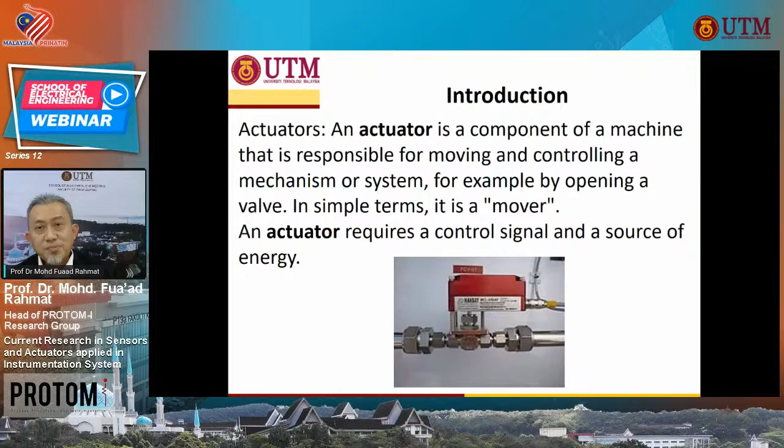And then these electrical signals will be converted in terms of amplifications, rectifications, filtering, and so on. And this variable will be manipulated and transmitted to the computer for further processing, either for control, for display, and so on.

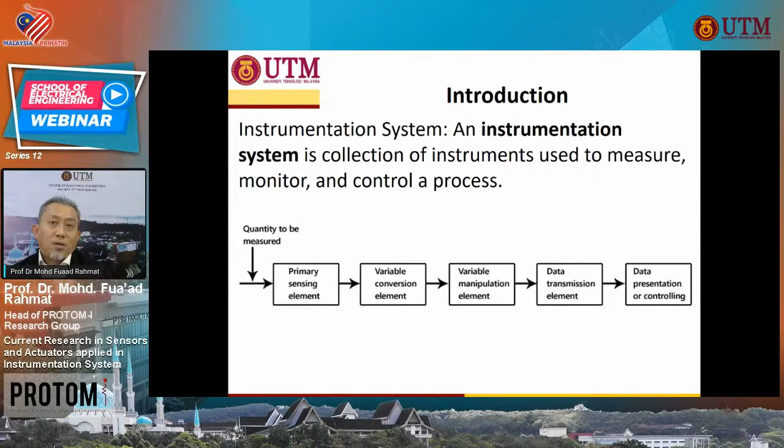So today I will talk about some activities in the research in our group, which is PROTOM-i, the short form of Process Tomography and Instrumentations. The backbone of this group is the Process Tomography System research, that's why it is in the middle.

The support pillars consist of 6 support pillars from other researchers as well, which is system identification and estimations, MEMS (microelectromechanical systems), control and automations, microfluidics, signal processing, and artificial intelligence and optimizations. Today I'm going to talk about process tomography systems and system ID and estimations, and the rest I will share with other researchers in my group.

So this is the Process Tomography and Instrumentation research group members. We consist of 17 members. For those in the School of Electrical Engineering, this is familiar to them.

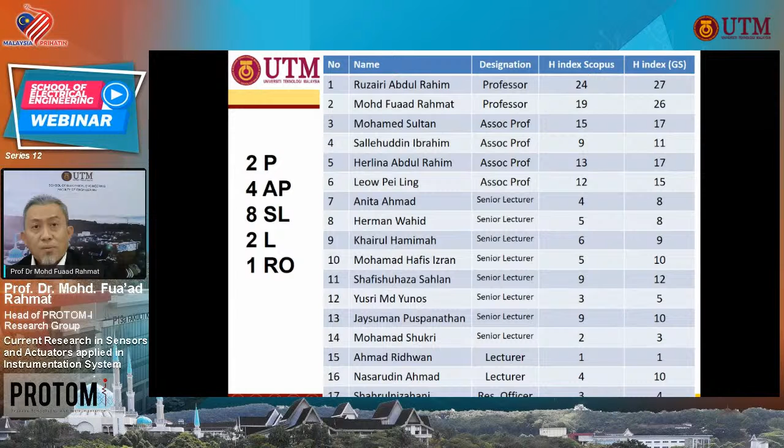17 members in the PROTOM-i research group, and our strength is shown here, where we have 2 professors, 4 associate professors, 8 senior lecturers, 2 lecturers, and 1 research officer. The strength of our group is also indicated by our publication strength, where the H-index varies from 1 to 24, as listed in this slide.

So that is part 1 of my presentation. I will go on to part 2, research in process tomography, which is the backbone of the research group PROTOM-i. If you go to Wikipedia or the dictionary, tomography is the combination of two words, tomo and graph, which is a slice of picture that represents flow in a pipe.

As we know, in an industrial pipe we have liquid, gas, and solids that flow inside the pipe. So engineers need to design a tomographic measurement system in order to monitor the flow of the gas, the liquid, the solids inside the pipe by using sensors that circulate around the pipe.

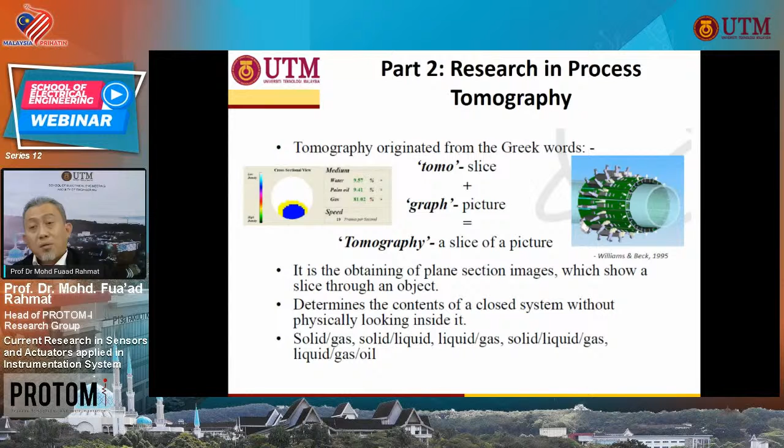So it is obtaining a plane of section image which shows a slice through an object. We don't have to break the pipe; we can monitor it using sensors which give signals from the flow, and these signals will be manipulated by the image reconstruction algorithm for display on the computer.

So why is process tomography important? For measurement of flow in clean liquids and fluids, we have a wide choice of instrumentation. However, if the process contains two components, for example solids and gas, or solid and liquid, or three components like oil, gas, and water, which cannot mix together, that becomes a problem for engineers to monitor the flow of that particular pipe.

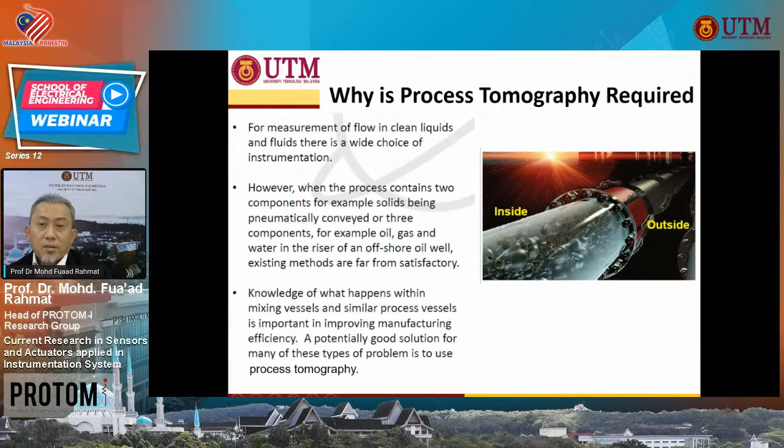Knowledge of what happens within mixing vessels and similar process vessels is important in improving manufacturing efficiency. A potential good solution for this type of problem is to use process tomography, which is cheaper and safer for monitoring the process pipe.

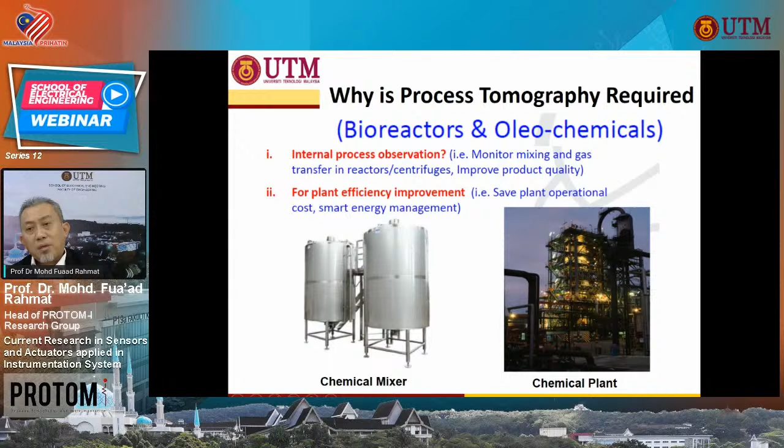Moreover, if we go to a chemical engineering plant or chemical mixer, process tomography is required, especially for bioreactors and oleochemical processes for internal process observations, in order to monitor mixing and gas transfer in reactors, improve product quality, and save plant operational costs with smart energy management systems. That's why we need process tomography to help researchers and engineers for the benefit of the process.

So in overview, tomography is an open loop system where you measure signals from the sensors, and these signals go to signal processing or signal conditioning, then to the image reconstruction algorithm, and then are displayed on the computer. That's why we need sensors mounted around the pipe, and we have to do some mapping - the inverse problems and the forward problems.

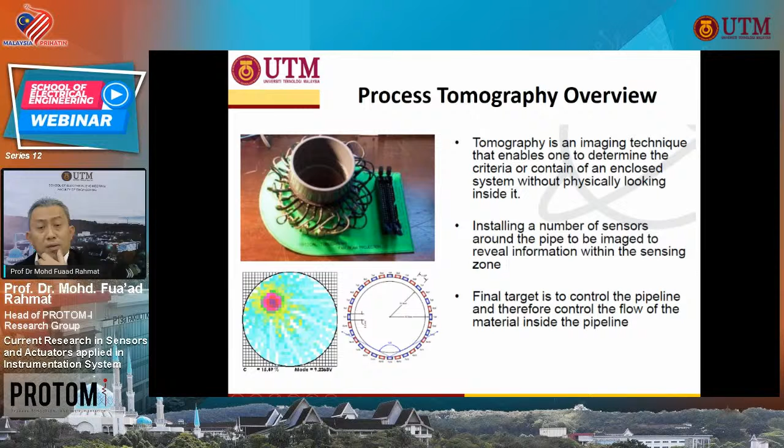Basically, tomography sensors consist of two parts: the hard field and the soft field. Hard field sets up a uniform narrow field for which the sensitivity is independent of the parameter distribution inside the sensor. So optical tomography, positron, X-ray, gamma ray are all considered as hard field.

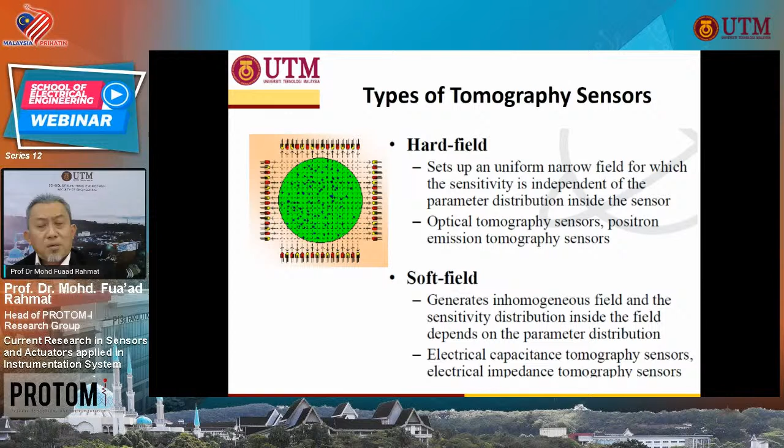The second one is the soft field, where we generate an inhomogeneous field, and the sensitivity distribution inside the field depends on the parameter distributions, which use a low current. Examples of this are electrical capacitance tomography, electrical impedance tomography, and so on.

The block diagram of process tomography, as I say, is an open loop system. It consists of an industrial pipeline, and the sensor mechanism can vary, whether you're using optical, capacitance, resistance, impedance, electrical charge, and so on. This sensor will detect the physical signals inside the pipe and convert them to voltage or current.

This voltage or current will go to the second phase, which is signal conditioning. Signal conditioning consists of pre-amplification, amplifier, rectifier, low pass filter, and so on, in order to improve the signals that bring the information, and it goes to the data acquisition system.

It goes to the image reconstruction algorithms. Most of the research in process tomography, the significant contribution is more towards the image reconstruction algorithm - how we manipulate the voltage and current information obtained from the measurement to construct the most accurate image representing the slice of the pipe.

This will be useful for inspections, concentration determinations, velocity measurements, mass flow rate measurements, environmental monitoring, flow measurement, or identification of the flow pattern inside the plant.

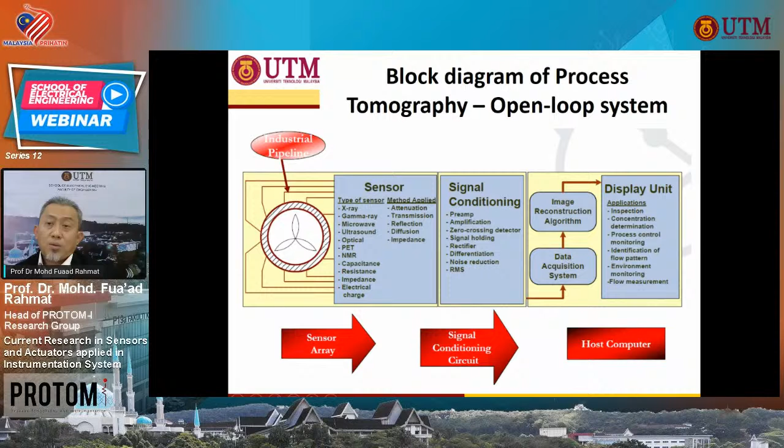Basically, industrial process tomography came in the early 1990s and late 1980s, due to the fact that tomography has been successfully implemented in medical tomography, where doctors use a scanner for body scanning in order to detect problems in humans - on the head, the leg, and so on - using X-ray as shown in the slide.

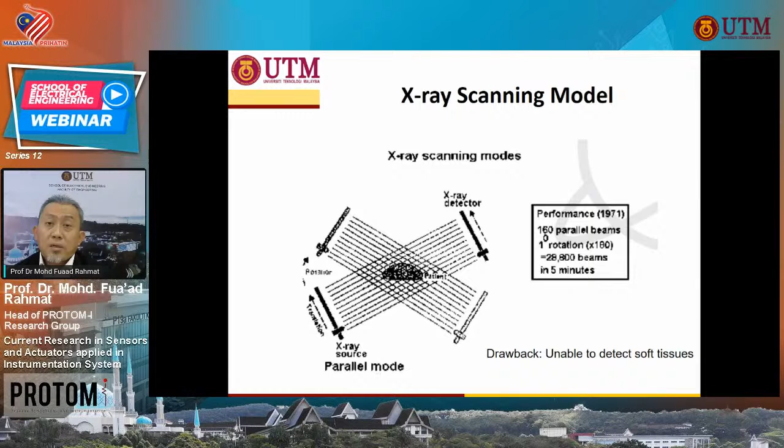But as you know, X-ray has its own disadvantage because it cannot detect soft tissues like discs between the lumbar, the brain, and other things. This disadvantage of X-ray scanning is covered by the medical tomography named MRI, or magnetic resonance imaging.

Nowadays if people have, for example, a slip disc problem, they're having lower back pain and leg pain. This is due to the spine of that human not being in good condition, and this can be detected by using MRI, where MRI is able to detect the soft tissues inside the human body.

So these are some of the examples of what MRI can do - for brain, for knee, for cancer, for depression, and for slip disc detection.

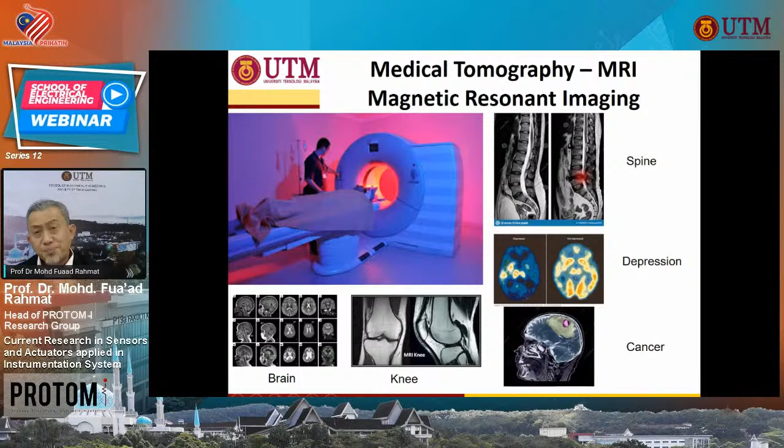We have discussed previously industrial process tomography and medical tomography. So what is the major difference between these two? Basically it is the time scale - the time scale and the data collected in order to reconstruct the image.

Medical methods can often take several tens of minutes to obtain a set of results consisting of many views and many projections from which the tomogram may be obtained. But in many process measurements, the event is constantly varying, so only a relatively few data are collected and available for the tomogram.

That's why industrial process tomography compared to medical process tomography is hugely different in terms of image accuracy, where process tomography is less accurate compared to the image refined by medical methods.

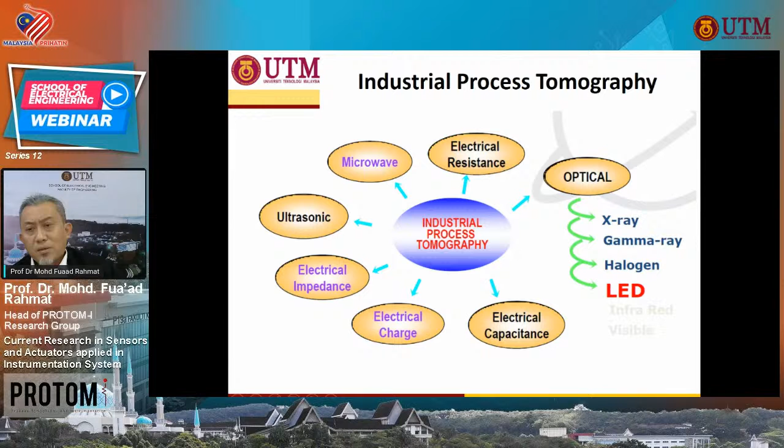From now on, I will describe industrial process tomography, which consists of some listed here: optical, electrical resistance, microwave, ultrasonics, electrical impedance, electrical charge, and electrical capacitance. Due to the shortage of time, I will discuss optical tomography, electrical capacitance, and electrical charge for the audience today.

Optical tomography system, or OTS, is shown basically from this block diagram, where we apply optical sensors - several optical sensors - in dual plane, one upstream and one downstream, where we arrange such that these optical sensors have transmitters and receivers.

Projection of the beam of the optical sensors can be used as parallel beam or fan beam. At the end of the day, the target is to collect data when the particle flows inside the pipe. This data will be captured by the data acquisition system, then reconstructed using algorithms for image display.

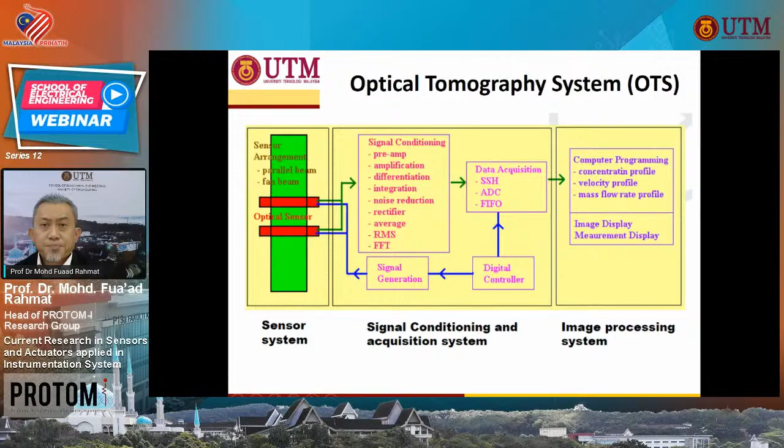As I told you before, for optical tomography systems, we have two basic projections of the beam from the transmitter to the receiver. The transmitter produces the beam and the receiver receives it. This beam projection consists of two types: parallel beam projections, where the number of emitters and receivers are the same and light divergence is not allowed, and fan beam projections, where the number of emitters and receivers can be unequal and light divergence is needed. So fan beam projection is much better, more recent compared to parallel beam projections.

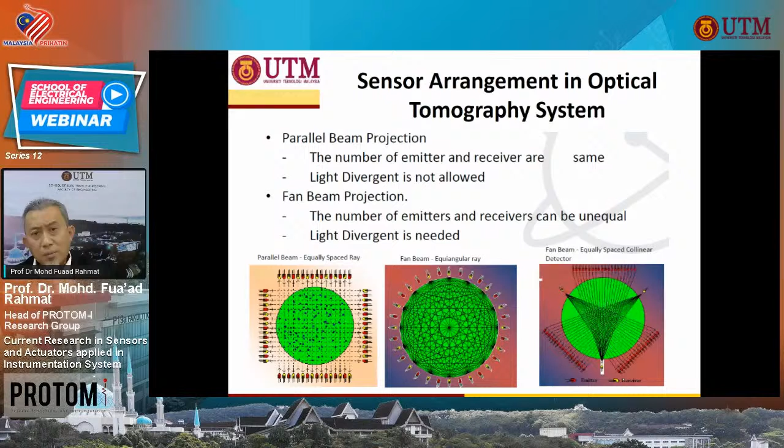In the early 1990s, optical tomography used pin photodiodes, where we arrange the pin photodiodes in a single plane, and there is an optical cable with a light source to transmit the beam from the transmitter to the receiver in order to obtain the image that crosses the pipe in the process rig.

After 1996, people stopped using pin photodiodes. Instead, people used LED, light emitting diode, which is much better and more accurate in terms of data acquisition. With the LED, we also associate it with fan beam projections, which give a better and more accurate image compared to the pin photodiode and parallel beam projections.

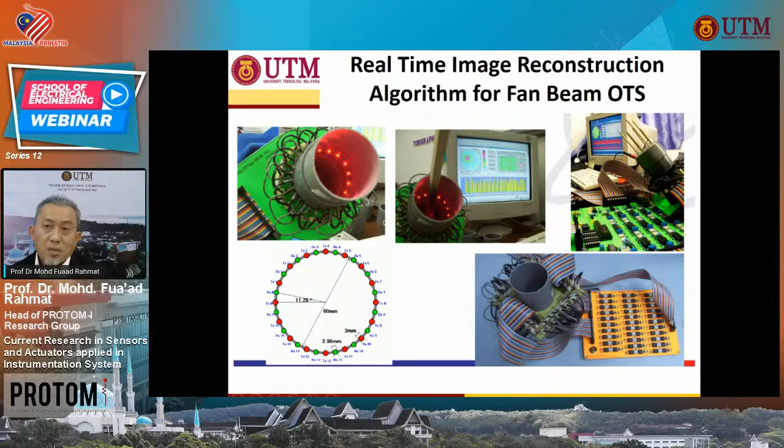In terms of that, an embedded system for a solid gas mass flow rate meter using optical tomography can also be achieved, where we can measure the mass flow rate of the particular solids flow in the pipe, using all the sensor arrangements and signal conditioning with a digital signal processing system.

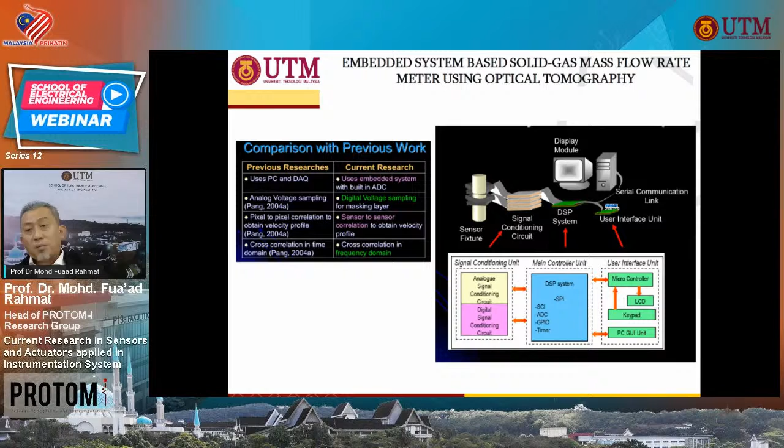Lately, in current research, the parallel beam and the fan beam have been merged together, called mixed projections OTS, or optical tomography system. All this effort is towards improving the accuracy of the image produced by the optical tomography system.

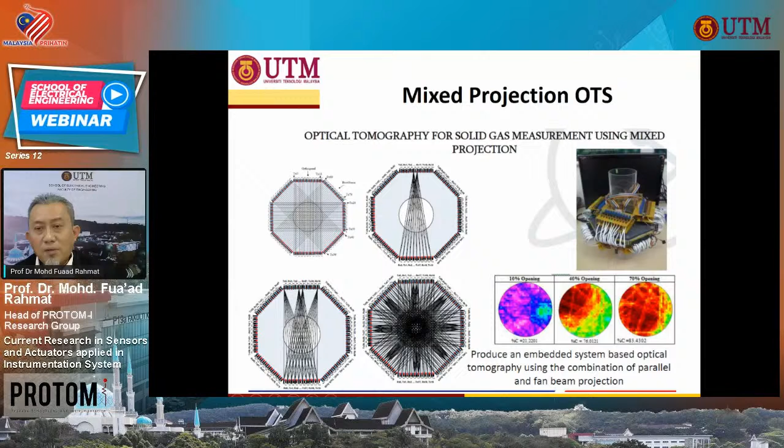Lately, in the past 3 years, bubbles have become an issue - how to monitor bubbles that flow in the pipe, which is the content of a liquid, and the bubbles inside the liquid. One approach is to use the optical tomography system and ultrasonic tomography system. I will show you one good design of the ultrasonic tomography system, which uses sound that can detect bubbles inside the pipe.

This is a real-time multi-phase flow imaging system. The flow consists of bubbles, the liquid, and the gas inside the bubbles. This real 3D image is by simulation - you can see the bubbles simulated using the forward problems.

This simulation will be verified using a real experiment where we inject bubbles inside the liquid. This is the target of the image we produce, showing the concentrations and distributions of the liquid, the bubbles, and the gas inside the pipe.

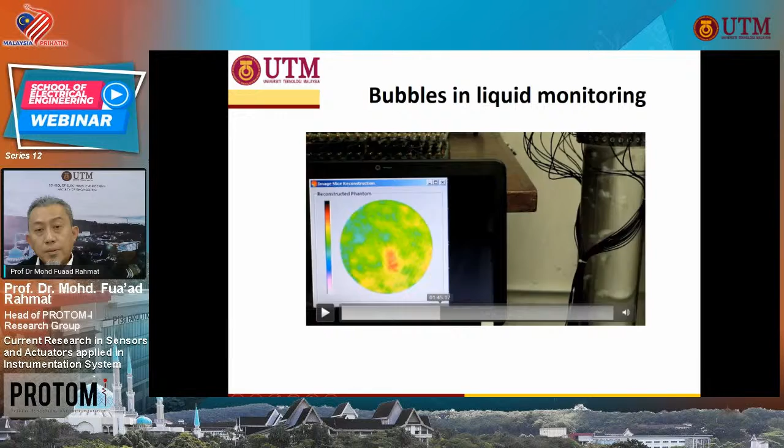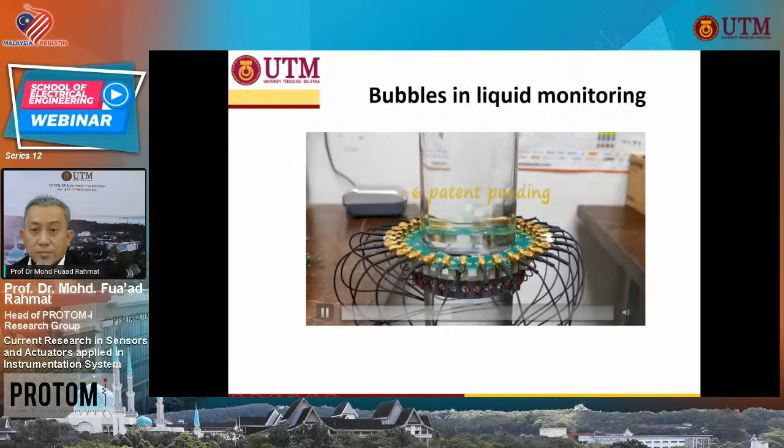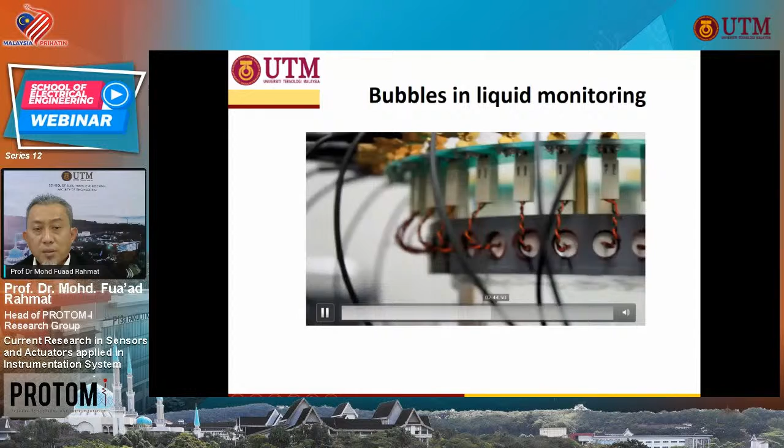The sensing mechanism used is the ultrasonic sensors. The arrangement of ultrasonic sensors is shown here, using sound. And some of the publications - all these particular things. So let's go to the other one.

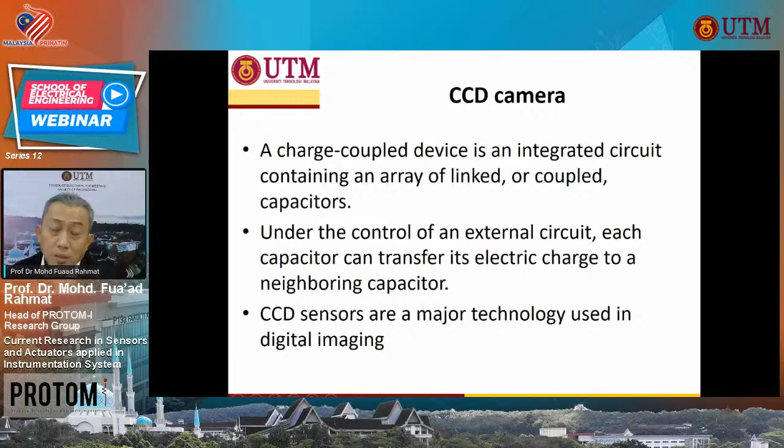CCD is one of the options for the optical tomography systems, known as a charge coupled device. This is also one of the research areas under our group, where we use the charge coupled device, an integrated circuit containing an array of linked or coupled capacitors. Under control of an external circuit, each capacitor can transfer its electric charge to a neighboring capacitor, which is used to capture digital imaging. This is one of the options of the optical tomography system, besides using pin photodiodes, LED, and so on.

Electrical capacitance tomography, or ECT, is a technique to visualize the distribution of two dielectric components, which measures the changes in capacitance or permittivity using the formula C equals K epsilon, where epsilon is the permittivity and K is the constant.

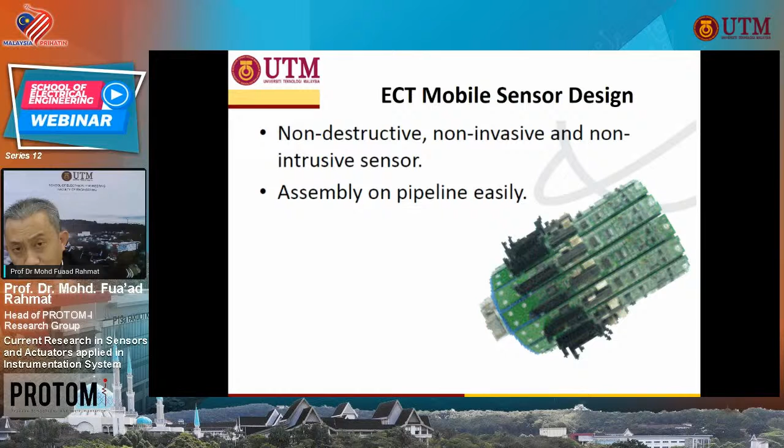Instead of static design, the research group came up with the ECT mobile sensor design. Previously, the capacitance sensor was fixed, the tomographic measurement was not mobile, it was fixed to the pipe. But now the design is more handy, more portable, non-destructive, non-invasive, and non-intrusive, and can easily assemble on the pipeline.

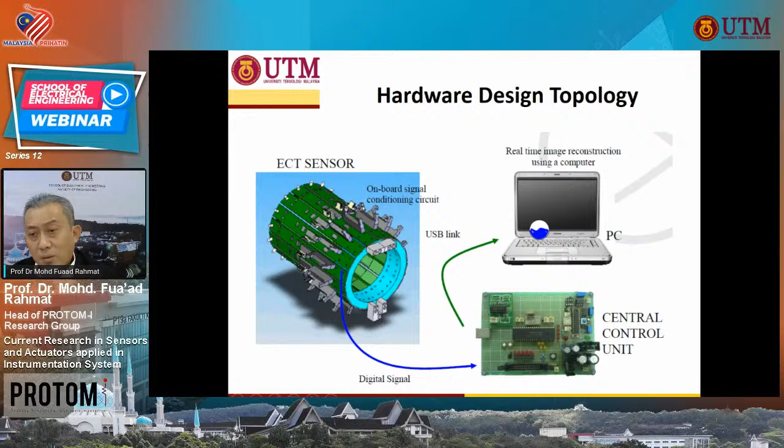This is the hardware design of the electrical capacitance sensor tomography, using a capacitance sensor here which can be taken out one by one, easy to take out and replace if it's not functioning, and then using a central control unit for data display.

This design of mobile ECT is one of the points that attracts the attention of industrial practice out there, because this ECT is capable of detecting water, oil, and air, known as the three-phase flow visualization.

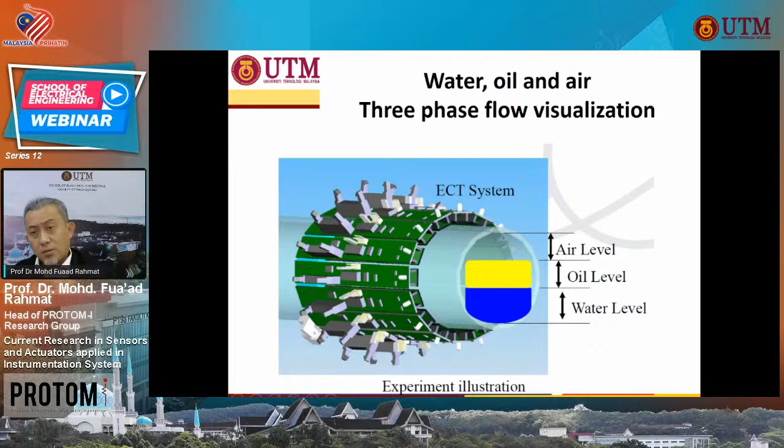We know that water, oil, and air cannot mix together. So this mobile ECT is able to show the image of the air, the oil, and the water levels using the ECT technique.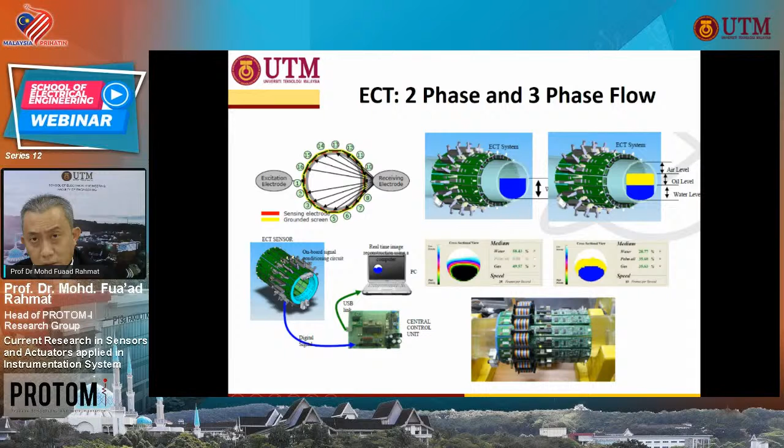It consists of two-phase flow and three-phase flow, either solid and liquid, or solid, gas, and liquid plus oil together.

It's also capable of measuring the velocity profile. To measure the velocity, the design must have two stages: one on the upstream sensors, one on the downstream sensors. The distance between the two stages is known, and the transit time from upstream to downstream is known, so we can find the velocity by dividing the distance by the time taken for the particle to travel from upstream to downstream.

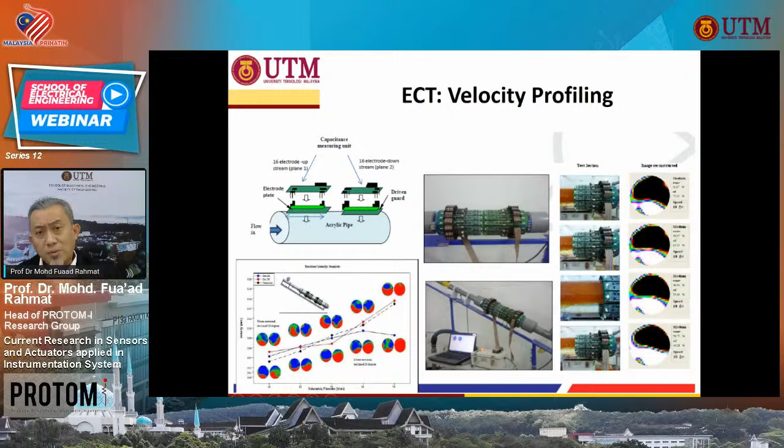The next one I will describe is electrical charge tomography, shown here. Electrical charge tomography uses the very basic formula in physics, where Q equals CV—charge is equal to capacitance multiplied by voltage. This concept is applied in the circuit here, known as the electrostatic sensors.

This electrostatic sensor will be put around the pipe in order to detect the movement of solid particles in the gas.

Electrostatic sensors use a moving dielectric object in the air, where you have particle movement—solid particle movement, maybe plastic bits, or anything solid that crashes together. Moving together and crashing together, they produce electrostatic charge.

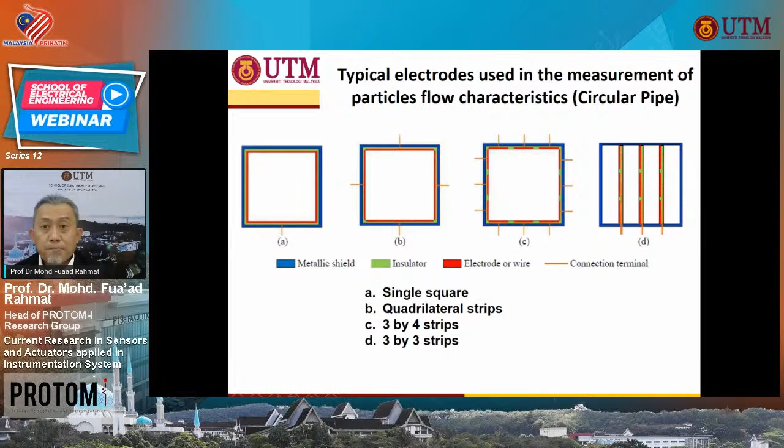In electrical charge tomography systems, research mainly focuses on producing concentration profiles, velocity profiles, mass flow rate profiles, solid particle sizing, sensor design optimization, and flow regime identification.

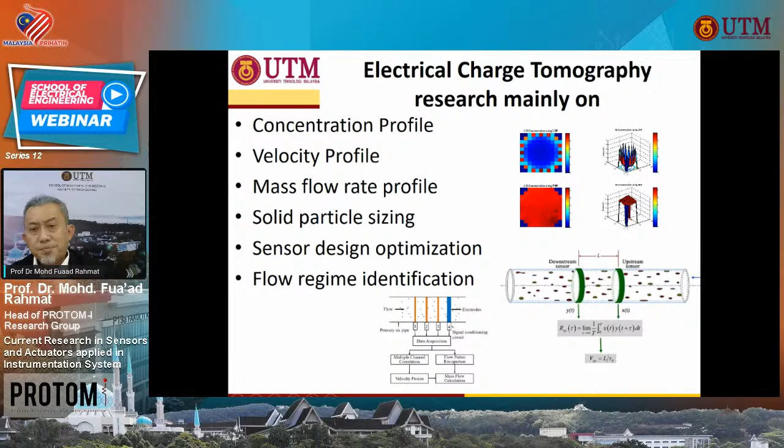For example, if you want to measure the velocity of moving solid particles in the pipe, we place two sensors here, upstream and downstream. We capture the voltage data from the upstream and downstream signals, then cross-correlate them to find the similarities between the two signals. These similarities are represented by the peak value of the cross-correlation, which detects the time delay, or transition time, from upstream to downstream. As long as we know the distance L, we can find the velocity, which is L divided by tau, the time delay taken from upstream to downstream.

In this electrostatic sensor research, we also considered particle sizing to be investigated, using a process jig where we can detect several particles ranging from 5 millimeters to 1 millimeter. The electrostatic sensor is able, using this electrode design, to give the value of the particle size of the solids in the pipe.

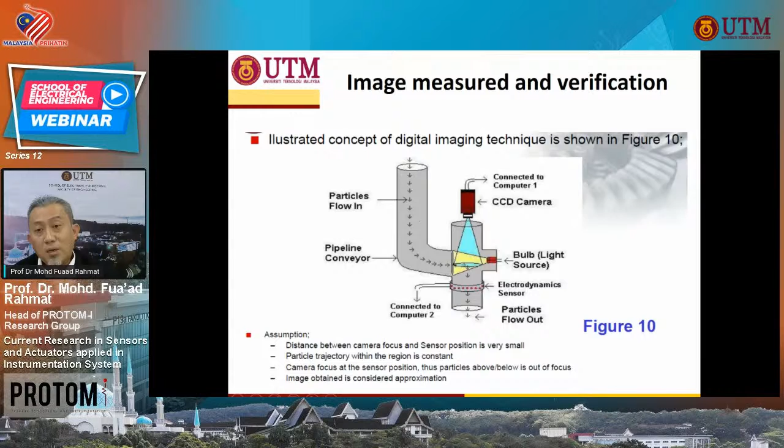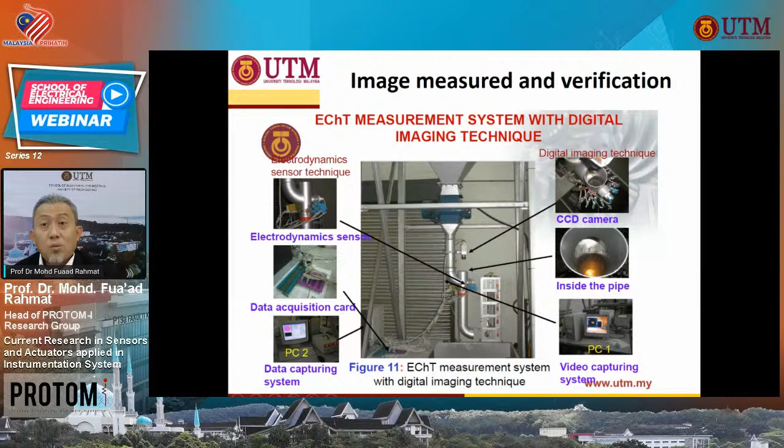This algorithm is verified using a CCD camera, which provides the real measurement, while the image reconstruction is the simulation measurement, and these are compared together. This is the real plant, where we put a camera here and the flow is over here. We use an electrodynamic or electrostatic sensor and compare it with the CCD camera image in order to find the new image reconstruction algorithms.

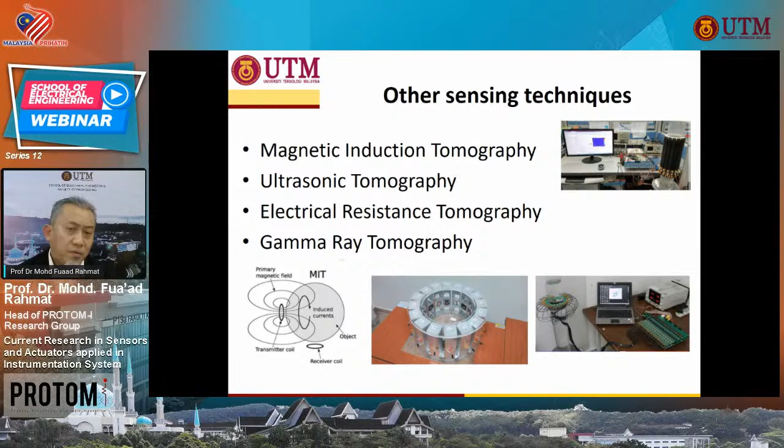Other sensing techniques that I will not describe include magnetic induction tomography, ultrasonic tomography, electrical resistance tomography, and gamma ray tomography.

From 2010 onwards, research in tomography has expanded rapidly by introducing dual modality techniques. A dual modality technique means two sensing mechanisms are combined together, consolidated together, in order to enhance the image obtained from the measurements. They use ultrasonic and electrical capacitance tomography, and ultrasonic and electrical resistance tomography.

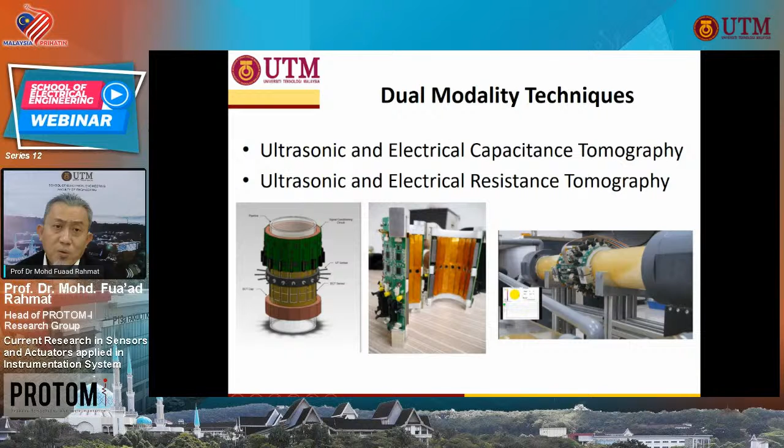This dual modality technique is vital because one sensing mechanism has its own strengths and weaknesses. The weakness of ultrasonic is covered by electrical capacitance, and the weakness of electrical capacitance is covered by ultrasonics, in order to enhance the image by fusing the data from the ultrasonic sensors and electrical capacitance sensors.

Ladies and gentlemen, now I'm going to part 3 of my presentation, research in system identification and estimation. System ID is one of the topics in control systems, related to mathematical modeling—building mathematical models of dynamic systems based on a set of measured stimulus and response data samples. System ID can be applied in a wide range of applications: mechanical engineering, biology, physiology, meteorology, economics, and what I'm focused on now is model-based control design.

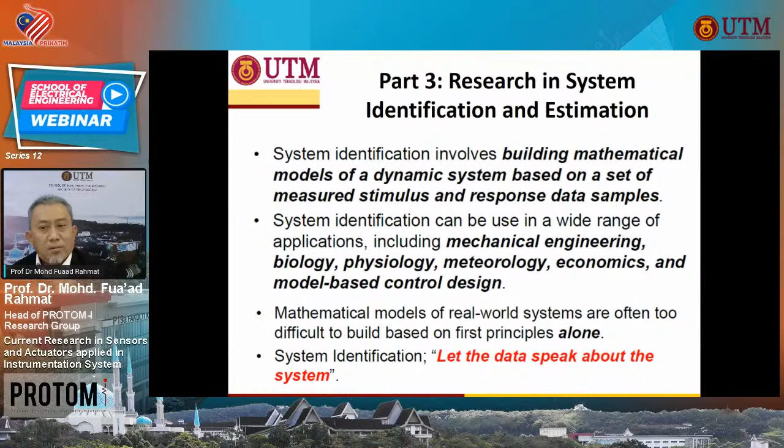Mathematical models are around us in real-world systems, which are difficult to build based on first principles alone. Sometimes it's not easy to derive a mathematical model based on first principle applications, for example using physics law, chemistry law, and so on. One method available that can be used is system ID, known as empirical modeling. We capture data from the input and output, then build the model based on input-output measurements, letting the data speak about the real behavior of the system.

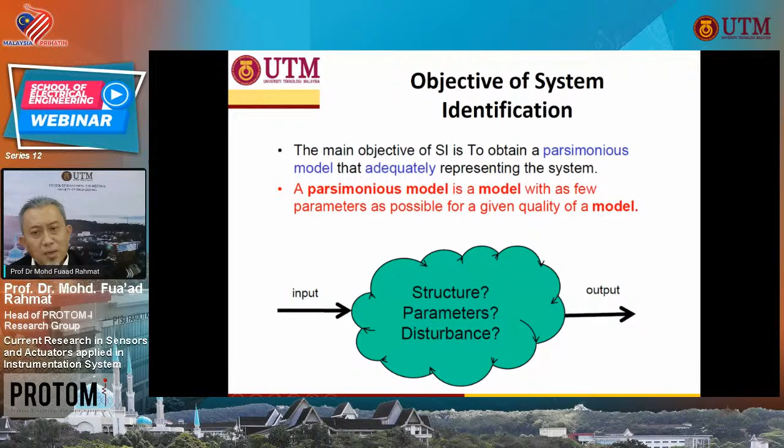The main objective of system ID is to obtain a parsimonious model that adequately represents the system. A parsimonious model is a model with as few parameters as possible, which still gives good quality. So when we talk about system ID, we are talking about the structure, the model structure, the model parameters, and the disturbance involved in the system.

If we see the spectrum of the models, system ID is about building dynamic models, so some knowledge about the models is necessary for successful identification. If you know nothing about the system, no information at all, you're dealing with a black box. But if you have some information, some formulas, some components that you know inside the system, that's considered a white box. So it varies from black box to white box.

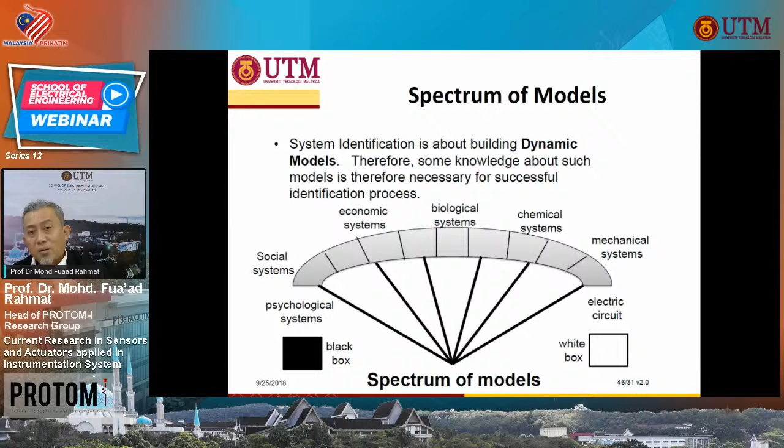Usually in engineering it's in the middle, the gray model, between black and white is gray. So gray model is the model that involves the system in engineering. The black box model is for psychological systems, social systems, and economic systems as well, because we don't have data to speak for itself.

System ID is a general term to describe mathematical tools and algorithms. We can consider it as three boxes: white box, gray box, and black box. In black box you know nothing, no information. In white box you have detailed information. In gray box you have 50% knowledge of the system, and the remaining 50% is unknown.

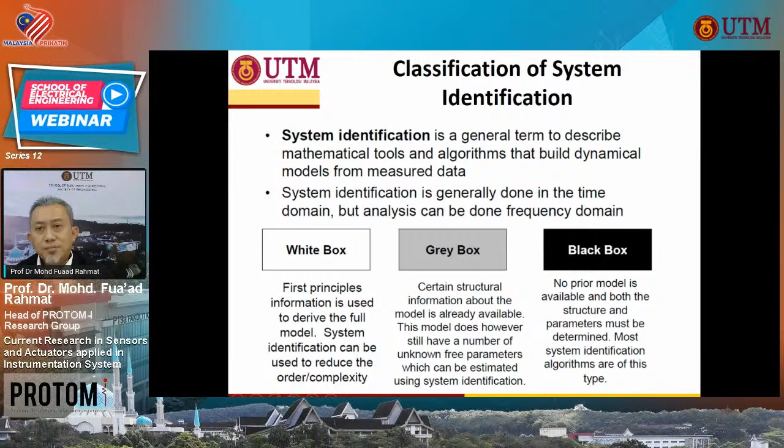So which one is better, modeling using analytical or modeling using empirical methods? Analytical is by derivations, using mathematical models, physics laws, chemistry laws, circuit theory, and so on. But empirical is you just inject the system with excitation signals, and then you capture the output.

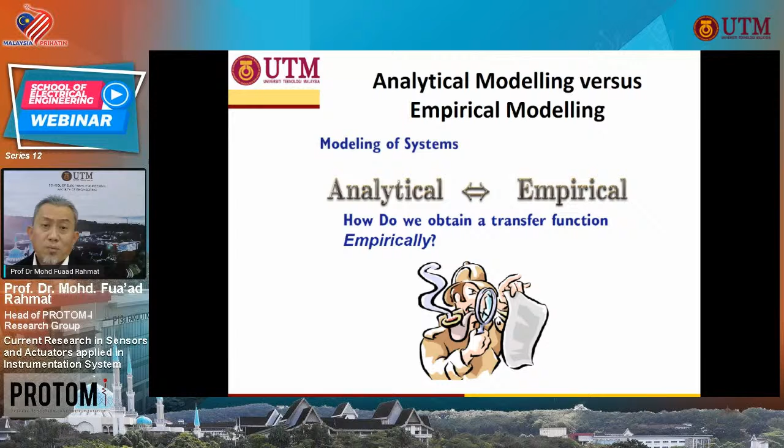From the input-output data you will get the model. So how do we obtain this model? It's simple. Which one is good, which one is bad? Both are good. Physical modeling has its own pros and cons, which consists of modeling a conceived system before hardware is built. But in black box, you don't have to build the model, you just inject the systems, close to the actual input-output behavior.

It's a convenient structure for parameter tuning, and useful for complex systems too. But both have their own disadvantages. For example, physical modeling often leads to high system order with too many parameters, becoming complicated. For the black box, there's no direct connection to the physical parameters, no solid grounds to support a model structure, and it's not available until an actual system has been built. So both have pros and cons, depending on the engineer or researcher. Both methods are good.

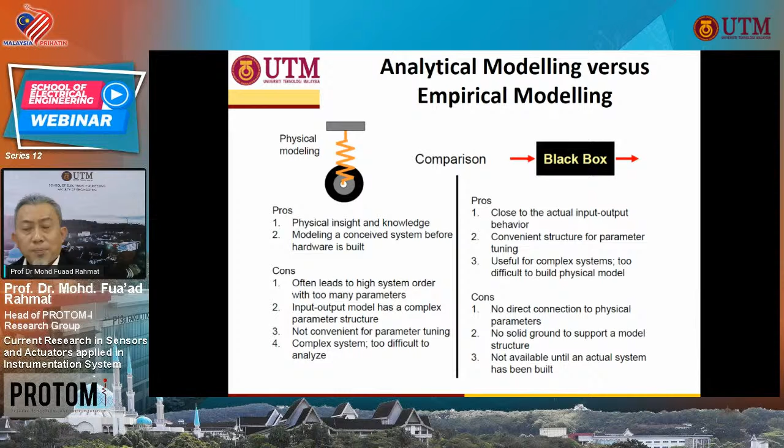But if you choose to use system ID, you have to follow the procedure. First, you design the experiment. Then you design the model structure. The model structure can be linear or non-linear. If you choose a non-linear model, the model will be more complicated.

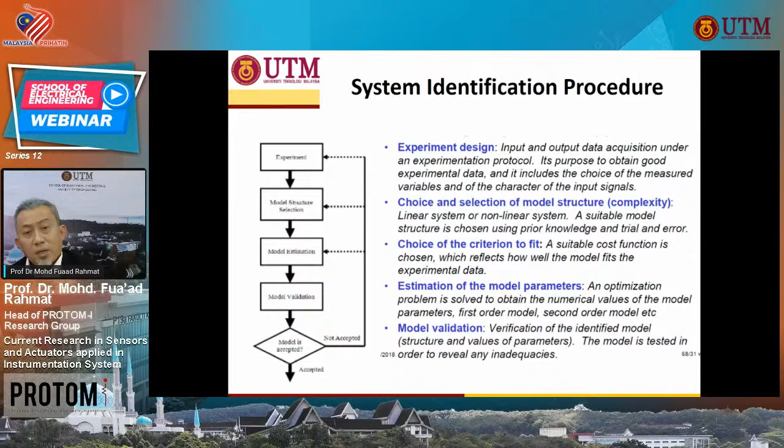Then you estimate the models, then you validate the models. After estimating and validating, is the model accepted? That depends on the accuracy percentage of the models. Usually we use more than 90% accuracy for the model to be accepted. Otherwise, you repeat the experiment, repeat the model structure selection, repeat the estimation method, and repeat the validation method that you use.

So the experimental setup in order to obtain the mathematical model of the system is shown here, where you design the experiment and design the input signals for the unknown plant. For research, the significant contribution is in the identifier algorithms, how you estimate the mathematical models and the parameters.

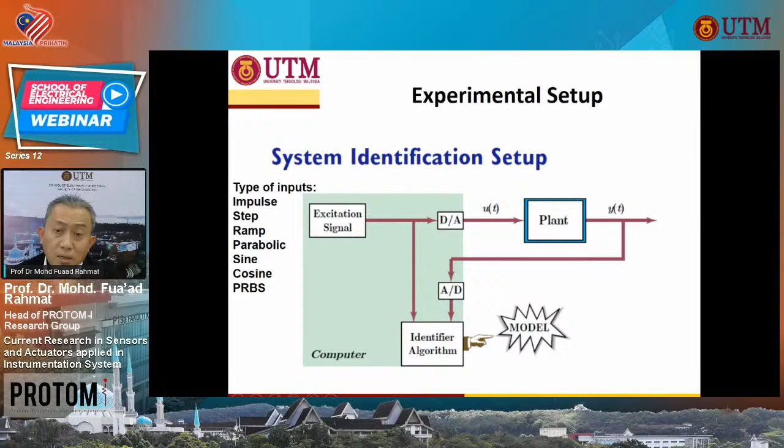If you go into research in control systems, the identifier algorithm is vital, it's the important method that always changes very fast, dynamically. Every day people are producing different identifier algorithms in order to produce good models.

So I will show you the gray box here, one of the samples, which is using the hydraulic actuator systems. This system is the EHA system test bed in the process control laboratory, where we have the cylinder of actuators and the external disturbance.

We have the accelerometer to measure the motions of the load of the pistons, and pressure sensors on the left and on the right. In this experiment, we are trying to detect the position tracking of the pistons that bring the loads over here.

So in order to measure the position tracking, we need a displacement sensor, which is the draw wire sensor. This sensor detects a physical signal, the displacement, and converts it to voltage. We can also use LVDT, the linear variable differential transformer, as an option.

This process has oil liquid inside, pumped by the motor, and this piston will move to the front and to the back. We need a power supply because the draw wire sensor or LVDT is a passive sensor; it needs a power supply to operate the conversion.

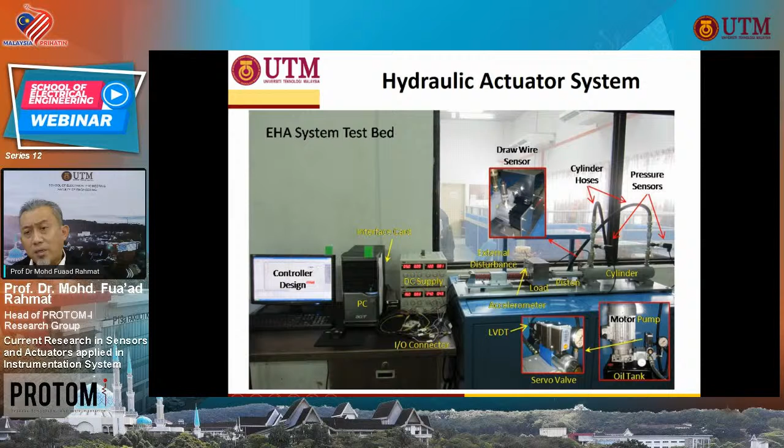And then we capture the data using a computer and data acquisition system. From the data, we produce the nearest mathematical model, represented by the hydraulic actuator system here, as the gray box.

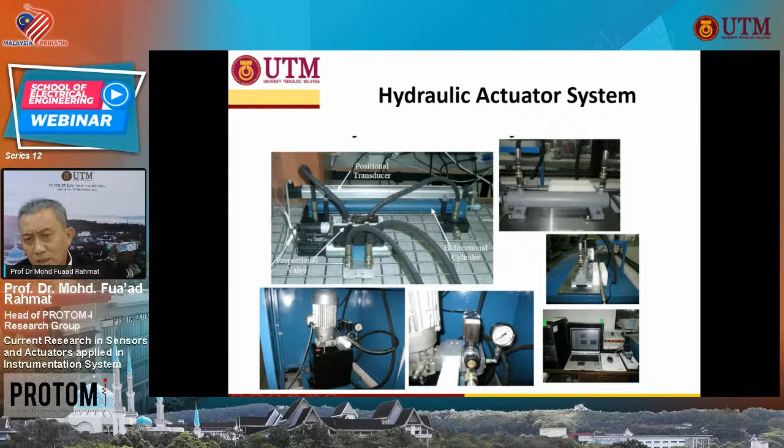So this is the components in the hydraulic actuator system: the pump, the servo valve. Actually we are controlling the servo valve, the door of the servo valve — the opening of the servo valve that controls the liquid flow inside the hydraulic actuator system.

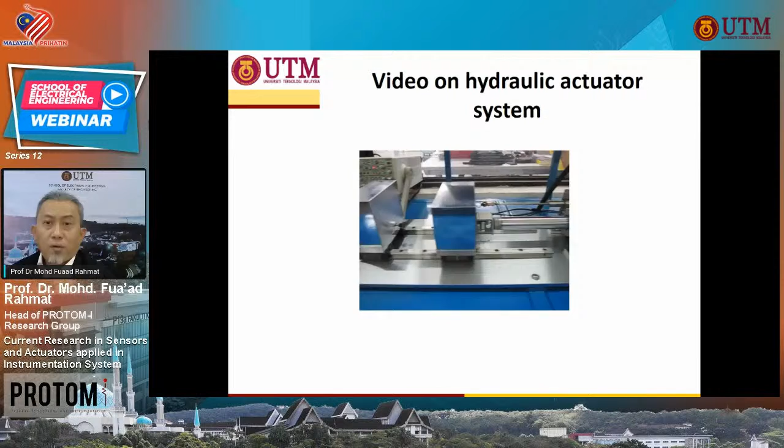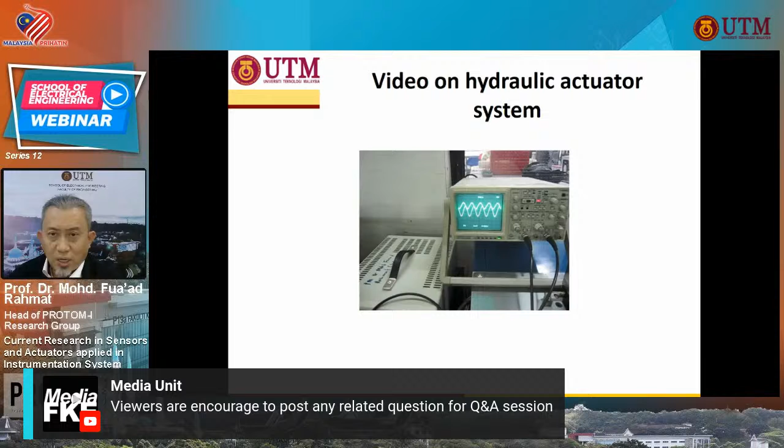So this is the video shown here. The piston is moving from front to the back. We are using LVDT to measure the displacement. The input signal used is a sine wave, and the output signal captured is also a sine wave, but different in terms of magnitude and phase.

So monitoring of the signal input and output using oscilloscope, and we capture the data using data acquisition systems. Then this is the process of the data in order to build the mathematical model.

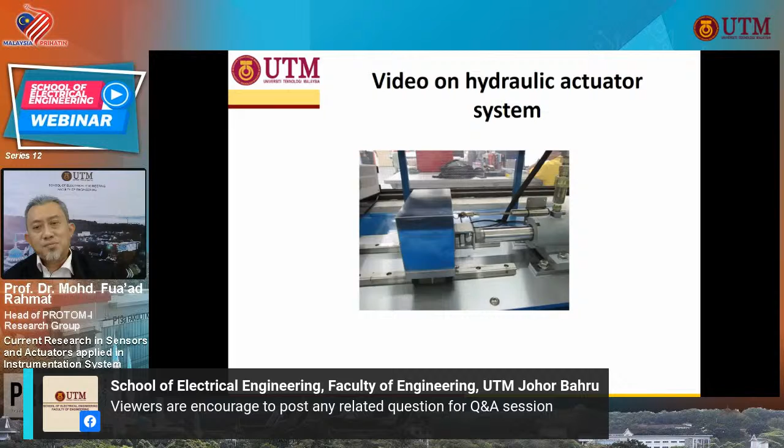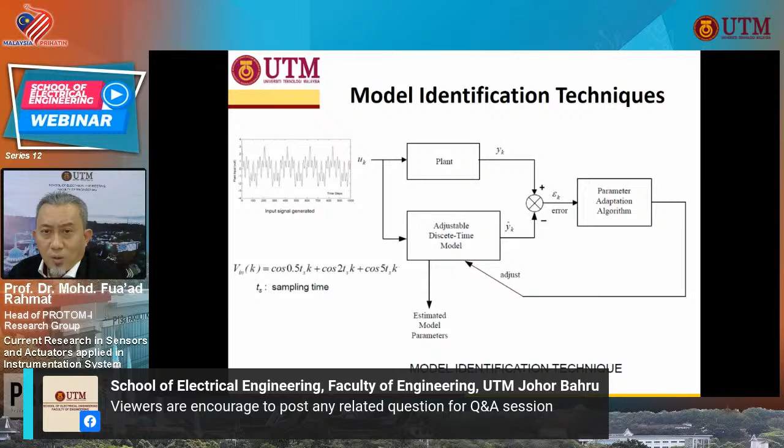So once we capture the data, here is the input, which is a cosine wave, injected to the plant, and this plant will be estimated by the adjustable discrete time model, the estimated model. This model comes from the parameter adaptation algorithm, which adjusts the parameter value so that it will be as close as possible to the plant.

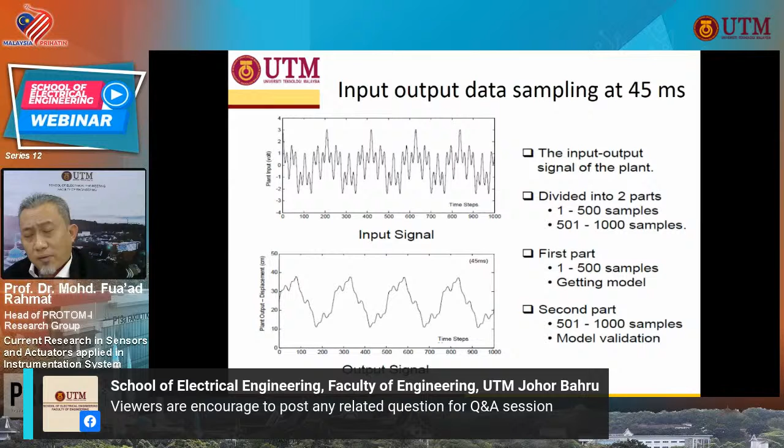So this is the input data. I show some examples here, which is sampling at 45 milliseconds, for the input and output data. So if we captured 1,000 data points, we divide the data into two parts: the first 500 is for the estimation, and the remaining 500 is for the validation.

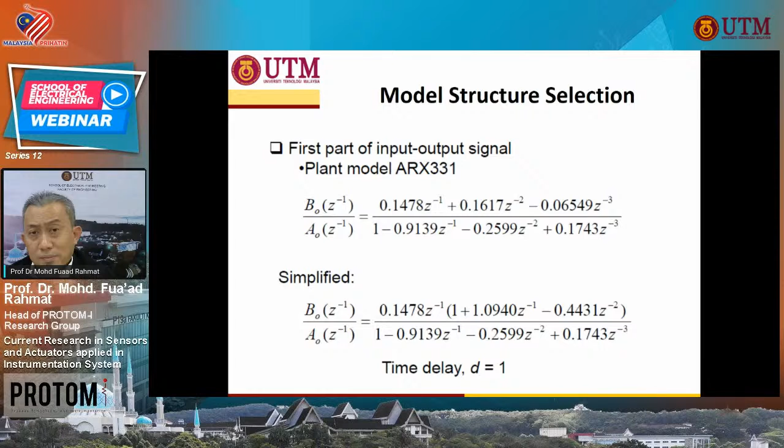After we process it, we use the model structure selection. In this selection, the researcher must be very careful either to choose the linear models or the non-linear models. Let's say we choose a linear model, which is ARX331. This model is a third order system, because this system is known as a third order. Then we analyze the poles and zeros of the data in discrete form.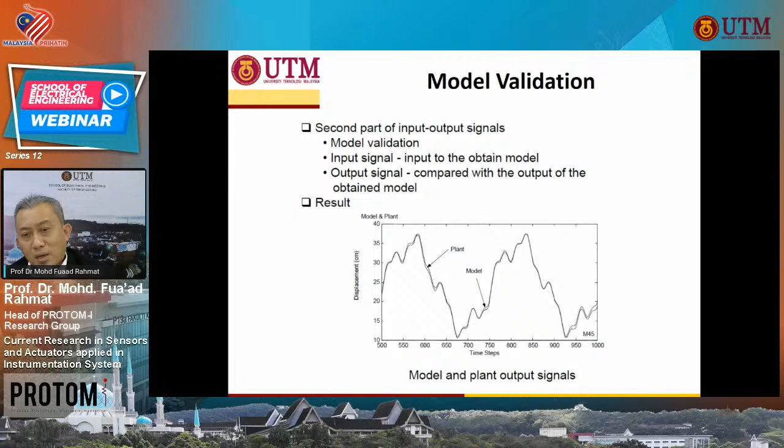94.6%, and this is supported by the loss functions, the FPE and the Akaike Information Criteria. Based on the smallest value, this model is accepted at 94.6% because the theory says that the acceptance of the model is more than 90%.

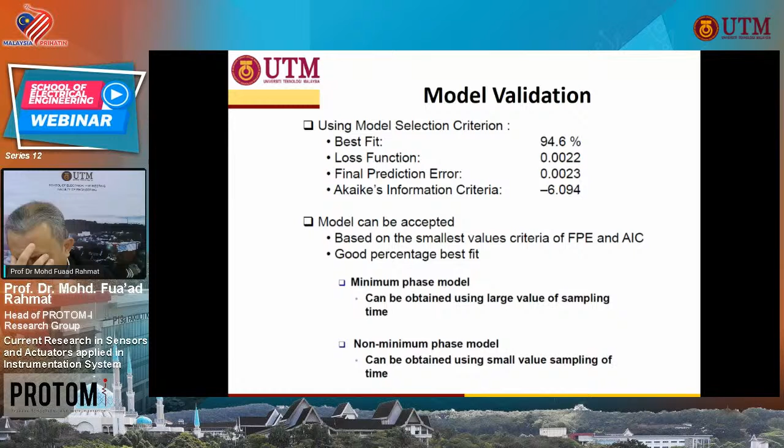So the second gray box here is the pneumatic actuator system. It's quite similar to the hydraulic actuator system. The difference is the medium: the hydraulic actuator system uses oil, but in the pneumatic actuator system, we are using air as the medium.

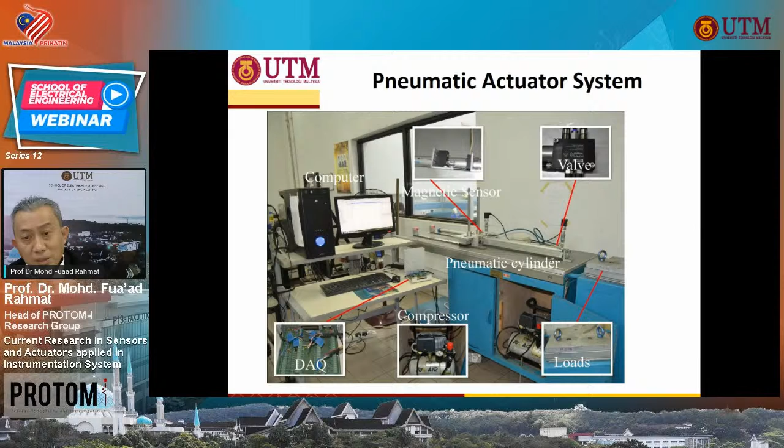This system consists of a control valve, a magnetic sensor to detect the displacement, a pneumatic cylinder, loads, a compressor to compress the air, and the DAQ to capture the data. This is the main component of the system, which is the control valve.

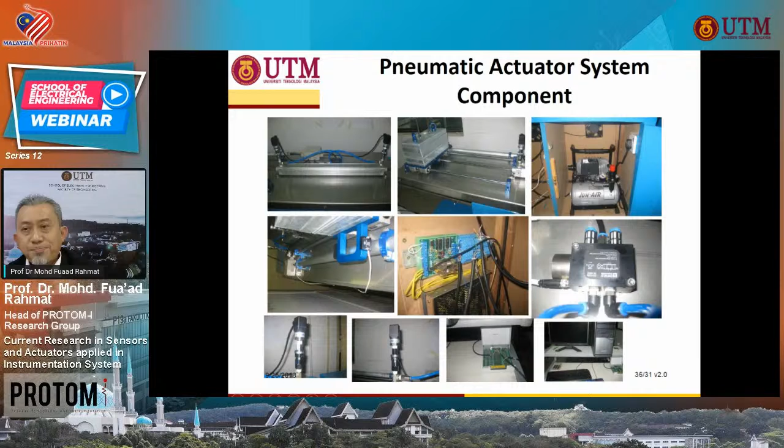What we are trying to do is to model the system and then design the controller that controls this control valve so that the output will follow the input. I'll show you some video of these pneumatic actuator systems.

So this is the load of the pneumatic actuator system, and this is the piston and the pressure sensor.

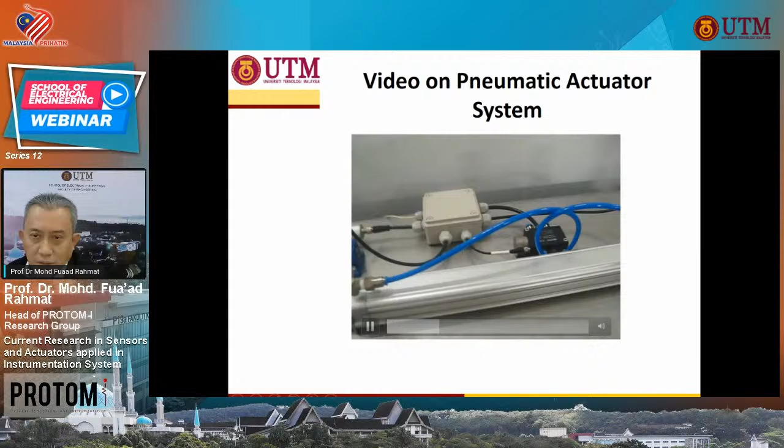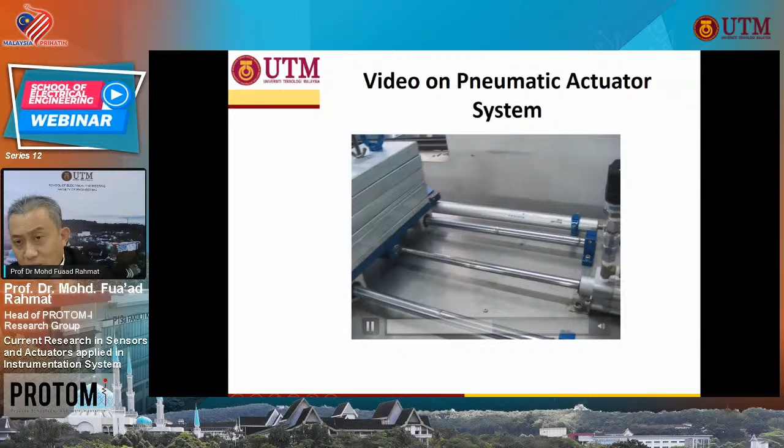The black box is this box with the control valve, two pressure sensors, inlet and outlet. It goes with the magnetic sensor to detect the position tracking of the piston that carries a load. The magnetic sensor is shown behind the load there. Okay, so this is the magnetic sensor.

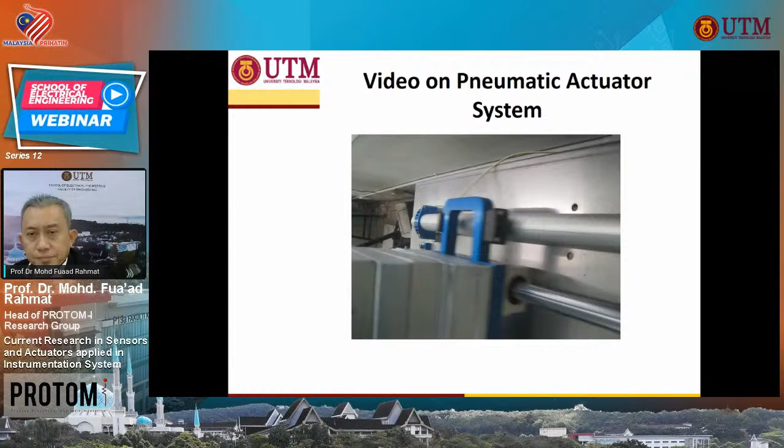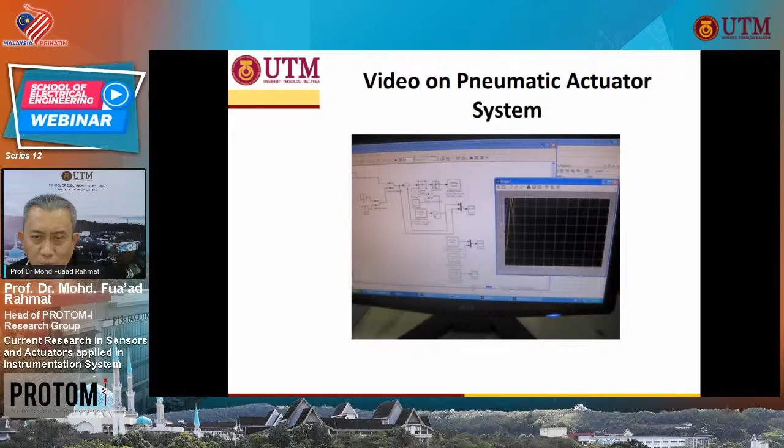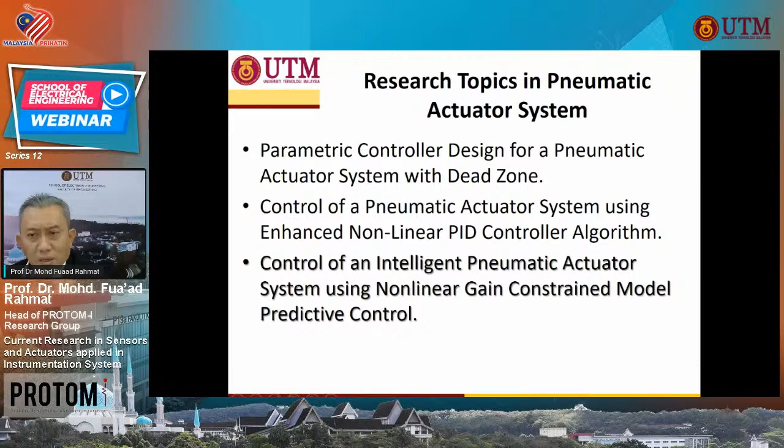All the data will go to the computer for processing in order to produce the accurate model. So this is some of the topics in the pneumatic actuator system in system ID estimation and control design. We focus on the dead zone problems, enhanced nonlinear PID control algorithms, and using a nonlinear gain constrained model predictive control, or MPC.

So now I reach part 4 of the presentation, which is to highlight the other research activities and opportunities in the PROTOM-i group.

Professor Rosari offered a new vacancy for PhD students, which involves the UTM CAPS drone - UTM Campus Autonomous Patrol and Surveillance Systems - where Prof. Rosari is the program leader and project leader number 4. So those postgraduate or future postgraduate students that have an interest in drone design can report to him by email.

By myself, I have 2 current research grants on flow regime identification in solid particle movement, and particle sizing measurement using electrostatic sensors via spatial filtering effects. I offered 2 places for postgraduate students, one for the first grant and the other for the second grant. 2 PhD students are needed.

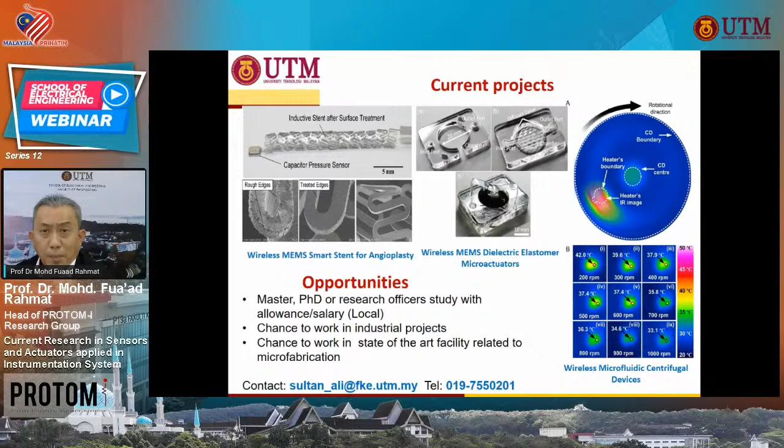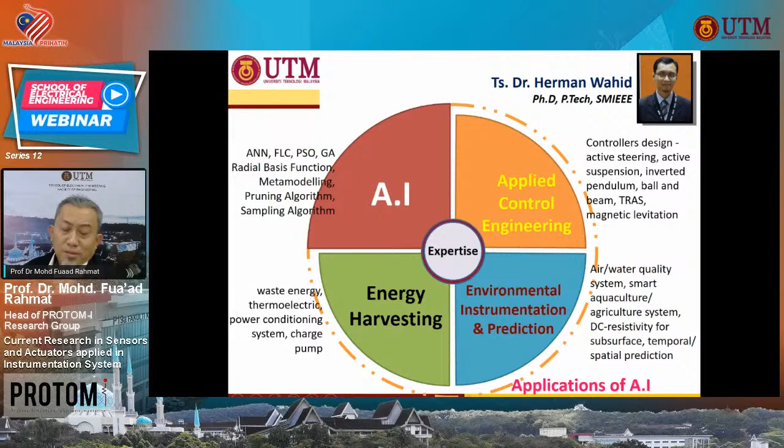The fourth researcher in our group, Dr. Herman Wahid, is a PhD holder in artificial intelligence. His field is AI, applied control engineering, environmental instrumentation and prediction, and energy harvestings - all corresponding to the applications of artificial intelligence.

Currently he has 2 research grants to be offered for postgraduate students. Those who are interested can communicate with Dr. Herman.

The 5th researcher on my list is Associate Prof. Dr. Leow Pei Ling. His research interest is in sensors, actuators, instrumentation and measurement, lab on chip, and microfluidics, in the micro scale and nano scale. Prof. Dr. Leow Pei Ling has about 3 research grants available for students to enroll as postgraduate students.

Not to forget our Deputy Director of RMC, Associate Prof. Dr. Herlina, also available to be your supervisor in the research expertise of instrumentation systems, sensor technology, near-infrared spectroscopy, and optical tomography.

And Dr. Shafishuhaza Sahlan is also involved in control and automation, energy management. She has 2 research grants active, and those who are interested in this field can communicate with her.